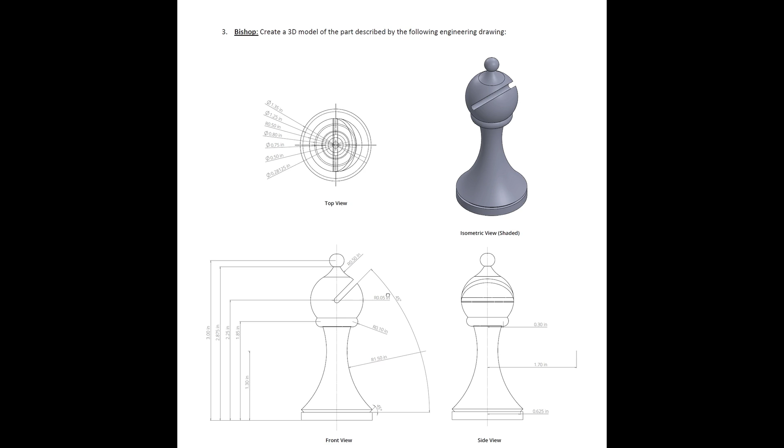This actually looks pretty intimidating when you open it for the first time. You see lots of arcs, lots of dimensions, but when you get down to it, it's not that bad. Geometrically speaking, the main part of the bishop is actually just like 5 arcs and a couple of lines.

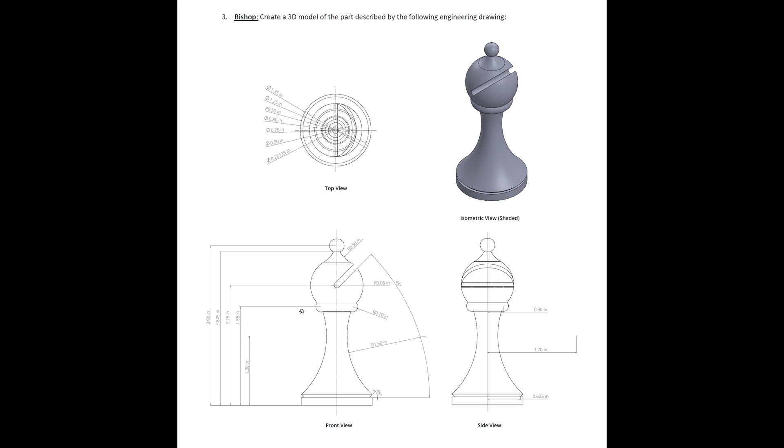So we're actually going to be modeling this using 2 features. The first feature is going to be a revolution, defined by a sketch consisting of half of a cross-section from the front view. Then we will create a cut, a linear cut, from a sketch on the front plane in order to match the part that's shown here.

So if I jump over to Solidworks and create a new part, I'm going to start with a sketch on the front plane. Now I'm going to arbitrarily decide that the origin of my part will be the bottom center, and then I will move all of my lines relative to that origin point.

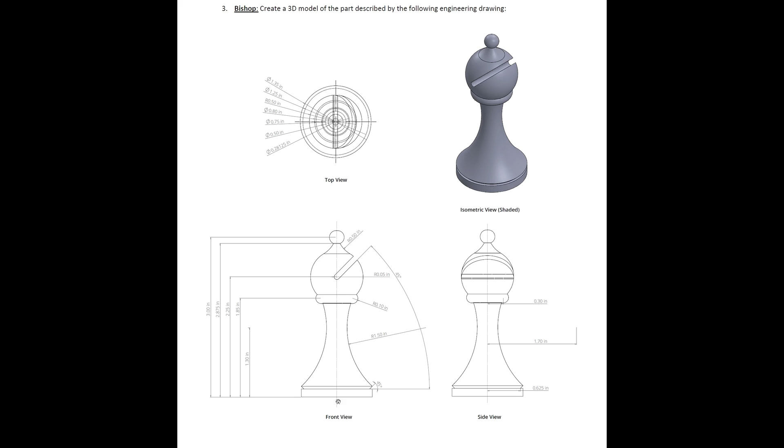So I will start with the basic lines representing the rough shape of the bishop. I will add a horizontal line from the origin, then a vertical line, then a jut in, and then an angle line up. And I'm pretty much out of simple straight lines.

Now I start venturing into arc territory. And I personally think that in this particular case, it's actually easier to draw whole circles instead of arcs, and then to trim off the parts that you don't need. Trying to draw this as a series of arcs just makes it a little more complicated, and it's harder to recognize the patterns and where the tangents appear.

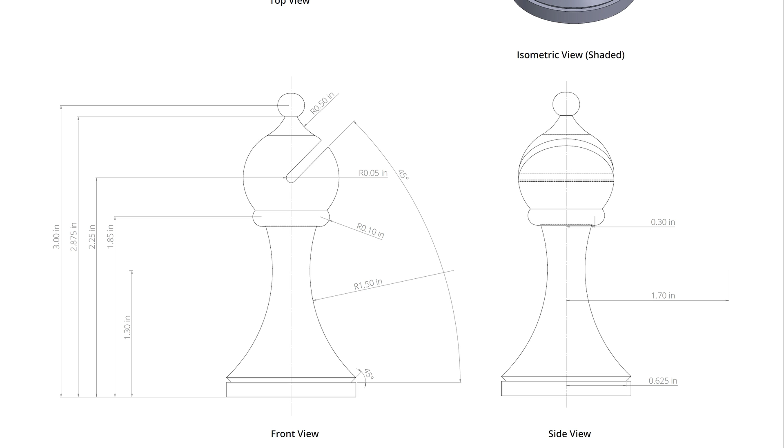But before I launch into circle territory, I'm going to add my axis of revolution just to make it a little easier to visualize what it's going to look like. So I will add a construction line of infinite vertical height, starting from the origin. There we go.

Now I have my axis of revolution. I'll add some circles. There will be one circle representing this surface, one circle representing the... I don't know if this is the head of the bishop, this is the hat of the bishop, this is the scarf of the bishop, this is the neck of the bishop. Okay, are we all in agreement on that?

So one of these circles will represent the neck of the bishop, one of the circles will represent the scarf, one of them will represent the head, one of them will represent the hat, one of them will represent the ball on the end of the hat, I guess. So I need 5 total circles.

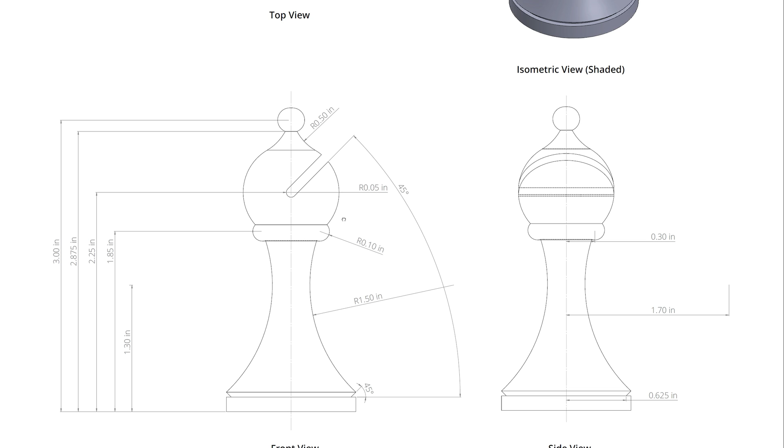So I'll use the circle tool starting from the center, and I will make 1, and then 2, and then 3-ish, and then 4, and then 5.

So I've recognized that these 2 circles are probably going to be coincident with this center point of that circle. So I've drawn it that way, but the dimensions will show us whether we're right or wrong. We can get rid of that coincident if we have to, but let's begin with those.

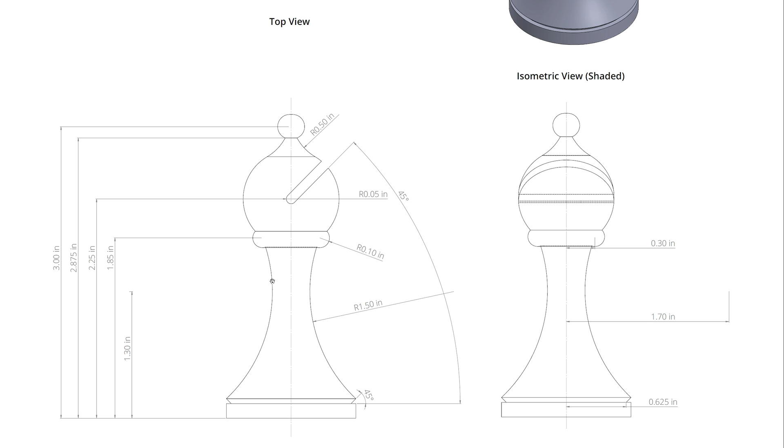Now I will start to dimension, and I'm going to start like I drew. I'm going to start dimensioning from the bottom center, so I need to know this distance here first.

And the way that I do that is by looking at this very scary looking top view. There are a lot of diameters given here. The relevant one here is the outermost object line, which has a diameter of 1.30 inches - a number that I won't remember for long enough to actually make it into Solidworks.

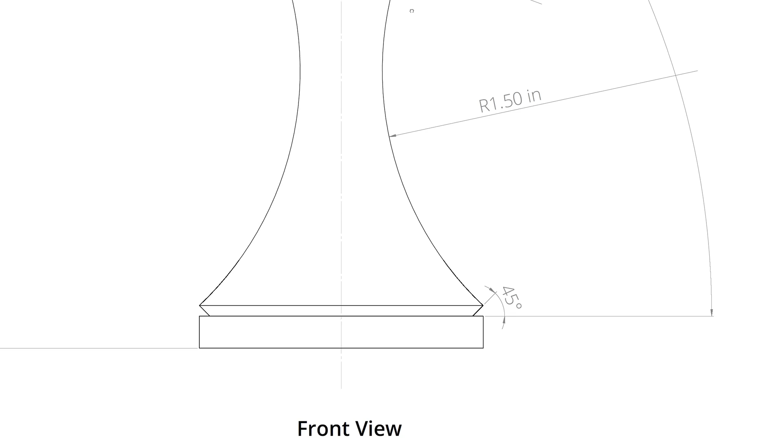If you look at the bottom of the front view here, you see how this point is vertically aligned with these 2 points. So that diameter of the outermost object line could represent this distance here, or this distance here. So that was 1.30.

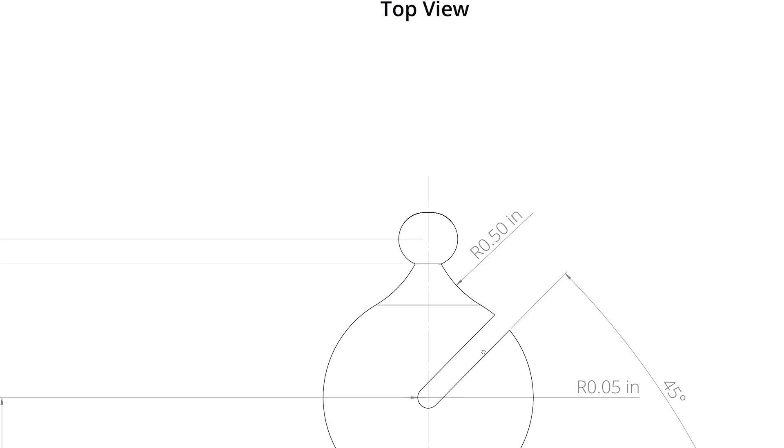Oh yeah, 1.35. So I'm establishing a radius instead of a diameter, so I will use half of 1.35, which I will allow Solidworks to do that math for me. And then I can't add a vertical distance of this yet.

I'm going to leave that for a little bit later. I know that you're probably concerned because you can't see that on the front view, but that'll fix itself later on. We'll come back to that, I swear.

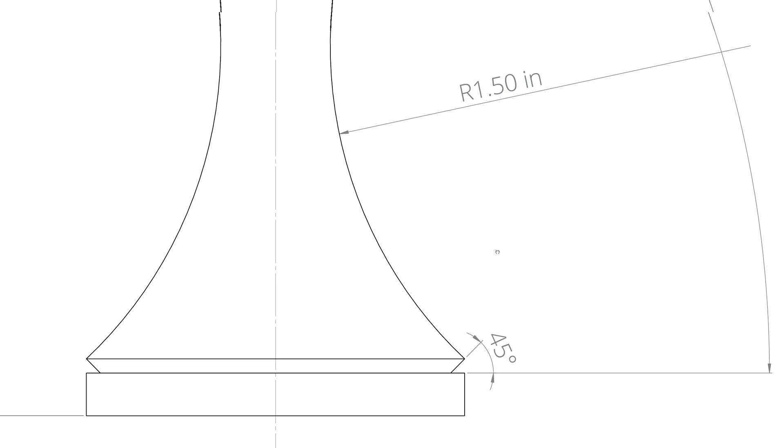Then I'm going to add the angle here of 45 degrees. And I will furthermore make sure that SolidWorks knows these two lines should be vertical from one another.

Cool. And I double click to exit my sketch for no reason in particular. I'm going to jump back into it.

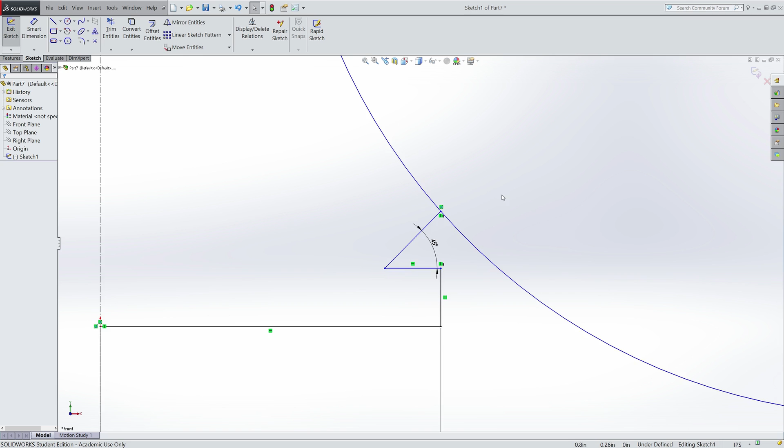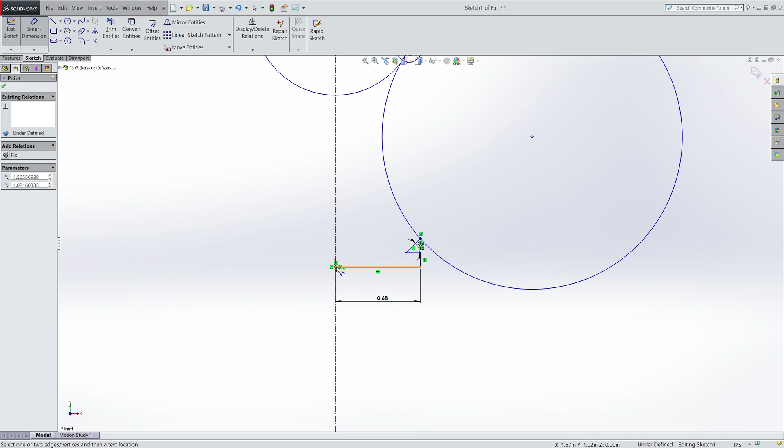Now I will add dimensions for this circle. The center of that circle is vertically 1.3 inches away from the origin, so I'll use the Smart Dimension tool. If you noticed when I was dimensioning that angle, Smart Dimension is pretty smart—if I click on two lines, it'll try to figure out what dimension I'm referring to. If I click on the center of this circle and then the center of the origin, depending on where I move my cursor, I can dimension a couple of things. I could dimension off this line, but I'm using the origin for demonstration. Dragging my cursor to the right gives a vertical distance, which should be 1.3 inches. Then clicking those two points again lets me add a horizontal distance, shown on the side view as 1.7 inches.

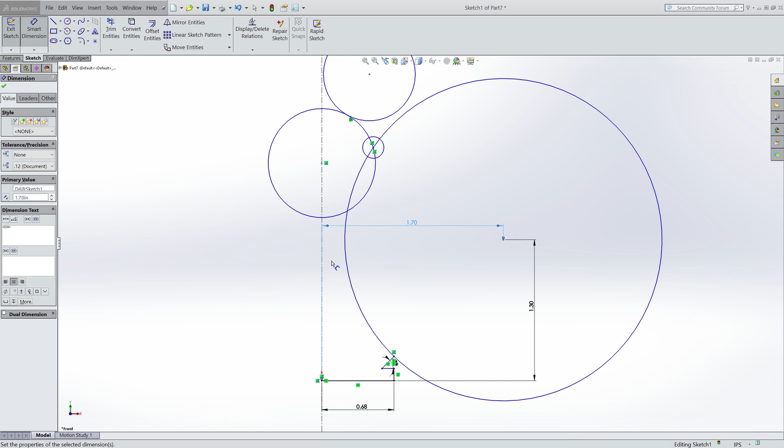Now I'll add a radius. It's shown as 1.5. SolidWorks will make me dimension a diameter, so that's 1.5 times 2, which on most days is 3. Wow, how did that end up being... let's try that again. 1.5 times 2 is 3, not 4.5. There we go, that neck is looking right.

So next up is the scarf, I believe. Let me drag my circle down to where I expect it to be, just to make that a little easier. That scarf has a radius of 0.1 inches, so a diameter of 0.2 inches. Wow, that's pretty close—good eyeballing me.

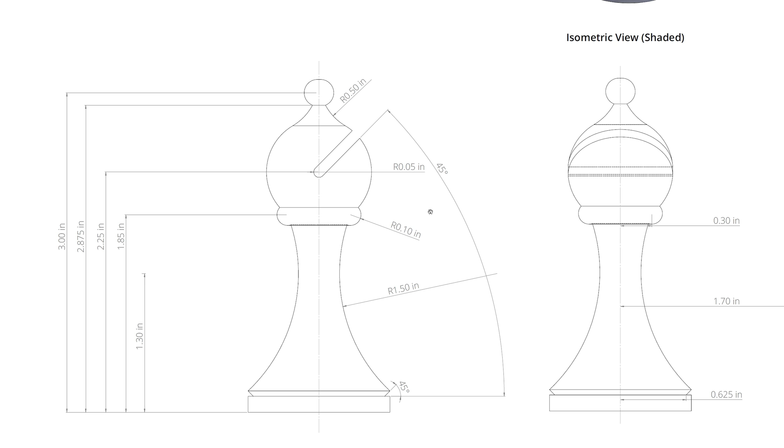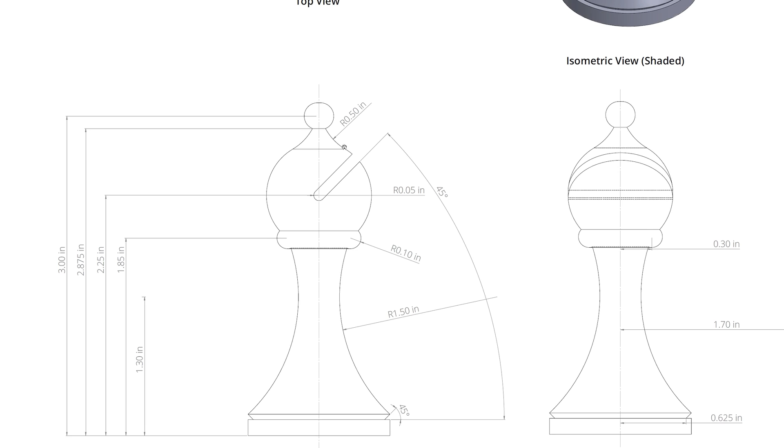The head of the bishop has a radius of 0.05—that would be this circle down here in the cut. So I need to jump back up to the top view, and recognize the head of the bishop will appear as an object line. From the top perspective, this bishop will have object lines here, here, here at the cut, and then here. So it's the object line that appears second from the outside—that's the relevant diameter. Second object line from the outside has a radius of 0.5.

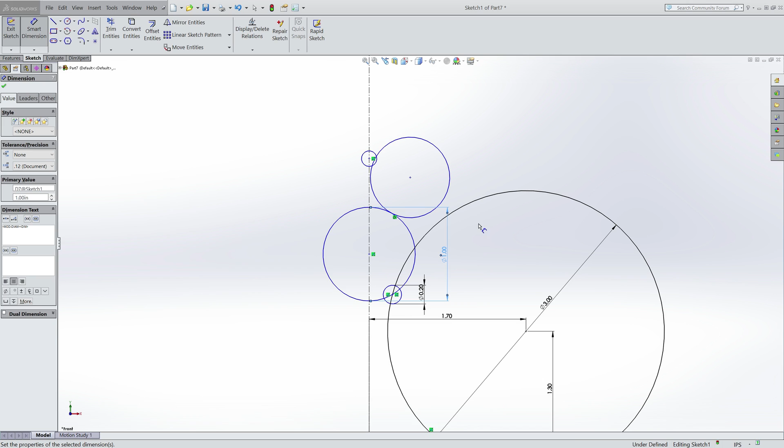Awesome, so a diameter of 1, 0.5 times 2. Yes, 1 inch. Then I'm going to give this a radius, shown on the front view—the base of the hat has a radius of 0.5. So that dimension is going to be a diameter of also 0.5 times 2, which I think is still 1, and it is indeed still 1.

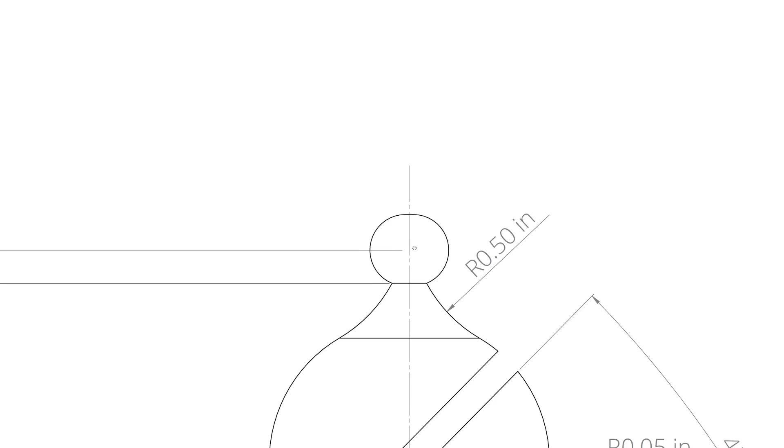Cool beans. Lastly, the ball on the tip of the hat, shown on the top view—again an object line, and this is going to be the smallest object line visible from the top. So the smallest object line is a diameter of 0.28125. Nice round number, 0.28125.

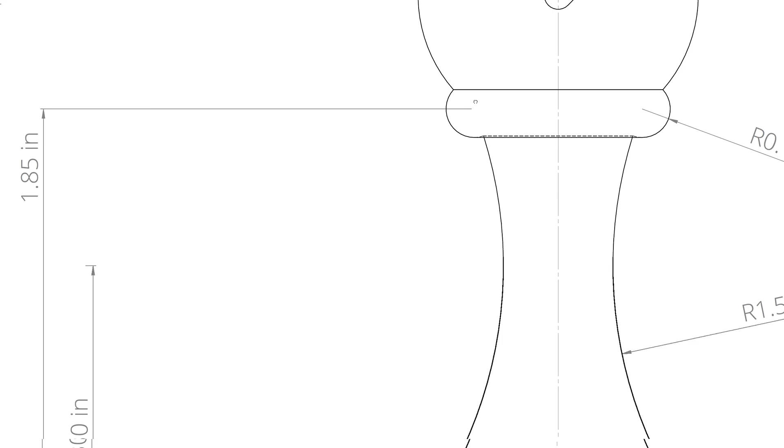There we go. Now I have my diameters, my circles, and this one is positioned, so I can start to position the rest of them. The first thing I'm going to do, just for my own sanity, is get rid of this coincident, because that's one that I'm predicting—I don't want to bind myself to it. I want to make sure it's free to move around, and if I think it's coincident, I can add that back later. But geometrically speaking, this bishop should end up pretty good.

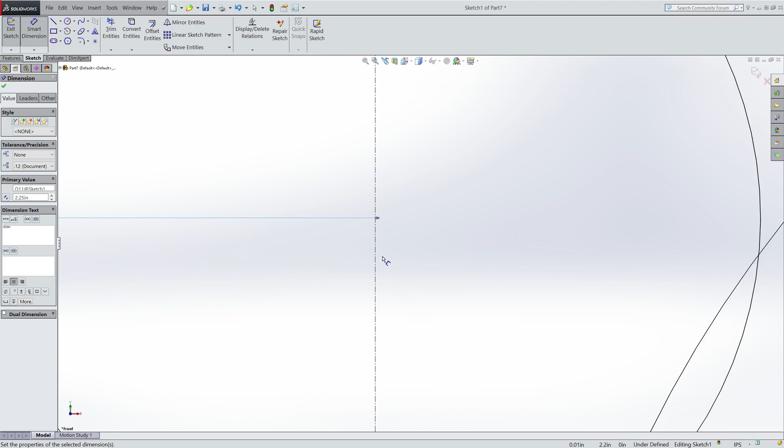So that is going to be a height of 1.85, and that's this distance here. 1.85. Then the next circle is vertically 2.25 up. 2.25, and look at that—look at that on the circle, pretty much centered, pretty close. Not bad, good job geometry.

And then my hat is tangent—the hat is also going to be tangent to the axis of revolution, so I'll add that now. I'm shift clicking the circle and the axis of revolution, adding the tangent constraint. Now that one's fully defined.

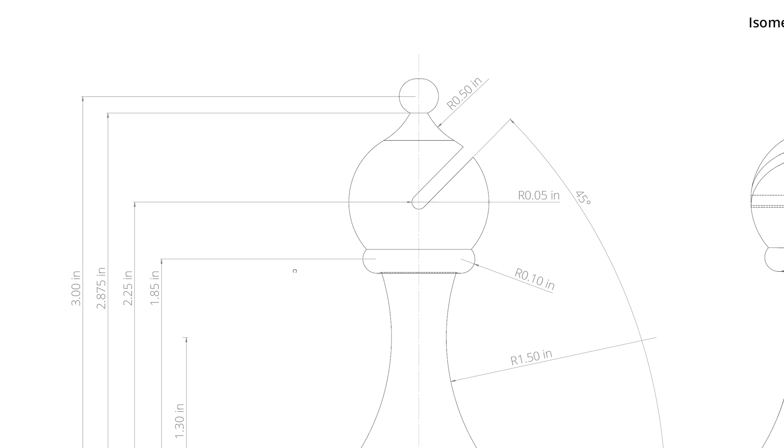Last but not least is the ball on the end of the hat, which is vertically 3 inches up. Okay, now I noticed I may have been wrong about that tangent. I was given a dimension here that's 2.875—that's referring to the intersection between the ball at the top of the hat and the base of the hat. So that supersedes the assumption of tangent between the circle and the center line. I'll get rid of that tangent and do this properly.

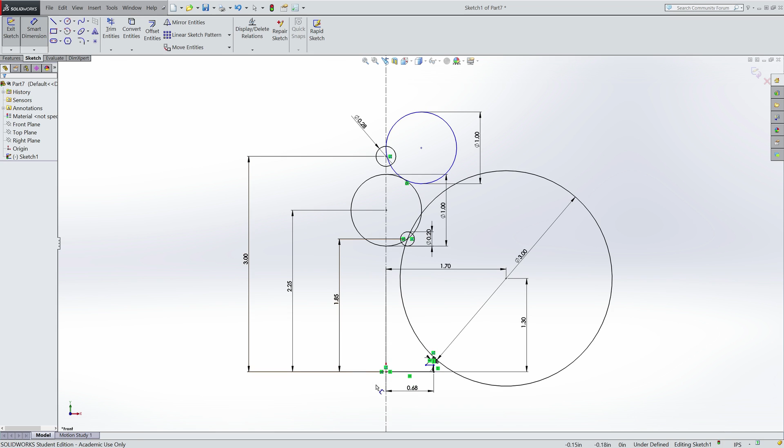Smart dimension, origin, this intersection here—so I'll have to do that a little differently. I need to clarify that I'm defining a new point, telling SolidWorks there is a point at the intersection of those two circles. So I create a point, and for the sake of demonstration, I'll draw that point out here in space. I now have a point.

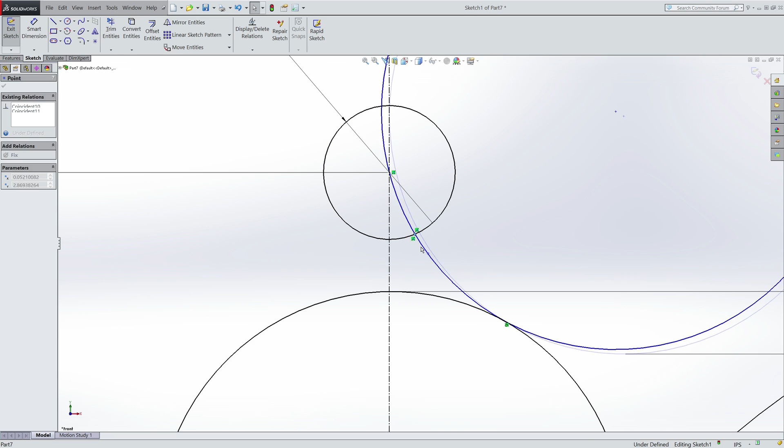Now if I shift-click that point and this circle, and tell it to be coincident, then shift-click that point and this circle, and tell it to be coincident, now that point is on both circles, therefore it's at the intersection. So I can move that around and adjust the position of the base of the hat thing. I'm going to use Smart Dimension, click on that new point, click on the origin, give that a dimension of

2.875, and look at that. Pretty close to tangent, but for the sake of round numbers, we're using that distance. So now I have some fully positioned circles.

Now I'm going to use my trim tool to get rid of the extraneous parts of the circles. Power trim is the easiest way to do that. You just click and drag, and any line that you go across is removed. SolidWorks tries to figure out the two intersections on either side of where you clicked through, and then removes the things between those two intersections.

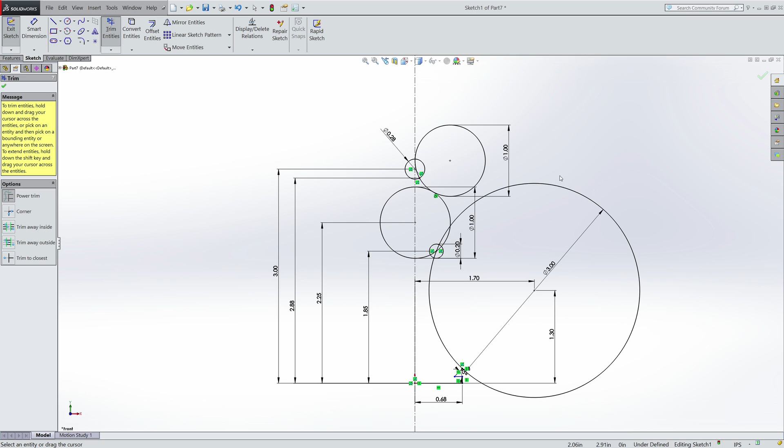So if I click and drag through this circle, you'll notice it got rid of that big part of the circle. The reason this little line is still shown is because that's used for dimensioning, showing the diameter of 3 inches. If I exit my trim tool and move this around, you'll notice that line disappears. It's not a real line.

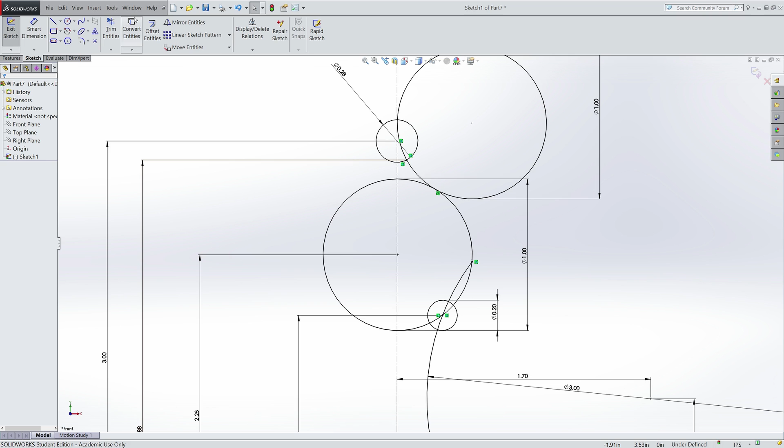So I will carefully use my trim tool and get rid of some more lines. That line, don't need that, oh whoops, a little too heavy-handed. Let's try that again. That line, and that line, and that line, and that line, and these two lines, and then that line, and that line, and that line, and that line.

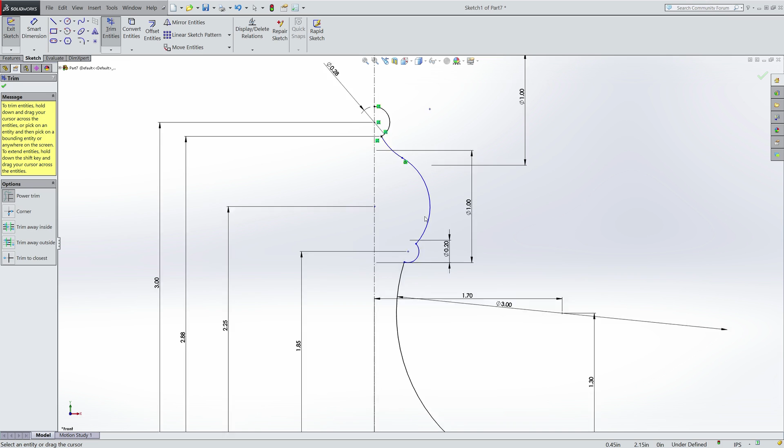There, I got rid of all my extraneous lines. You'll notice that I also kind of broke a couple of my constraints. That's okay, I can go back and fix those. So one of the constraints is the fact that I think this line doesn't know—yeah, so I need to clarify that position again.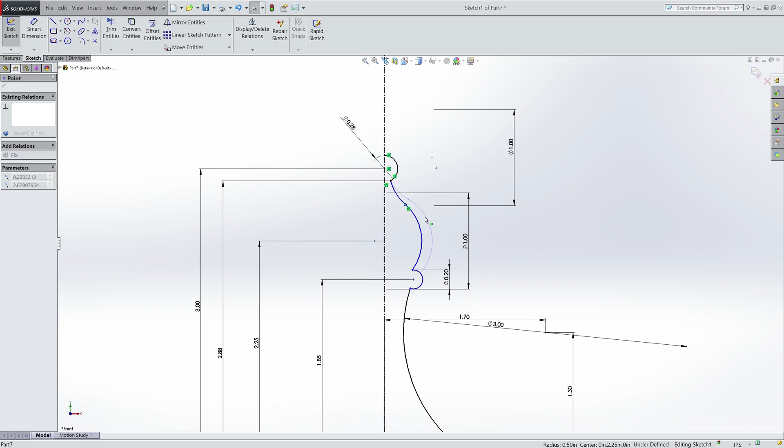So now that it's able to be moved around, I'm going to clarify that this head is going to be coincident to this point. And then I'm going to make this point, that's the center of this arc, also coincident to this arc. So I've basically restored the fact that these two circles had once been touching.

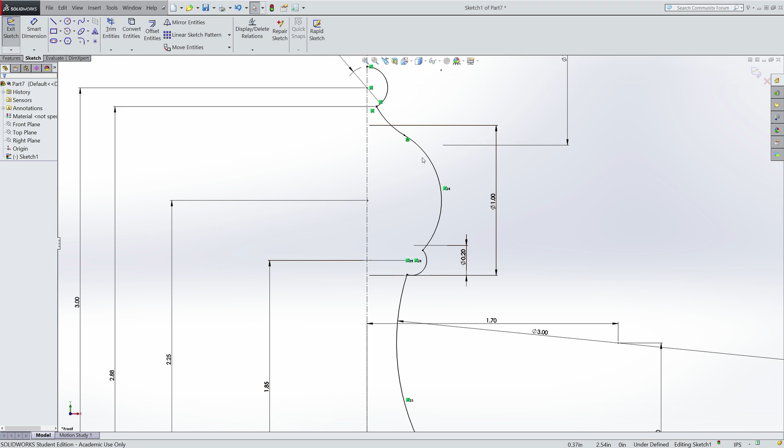So by making this center point coincident, I'm telling it that this center point and this line should touch. And even though they don't touch, they would if this line were continued—it intersects with the function of that arc. Now I believe all of my lines are fully constrained.

I have the basic part, except for this thing we talked about. I need to bring this back. So I'm actually going to be giving this a horizontal distance, not a vertical distance. You see I can drag this around, and if I give it a horizontal distance, that'll bind its vertical distance as well.

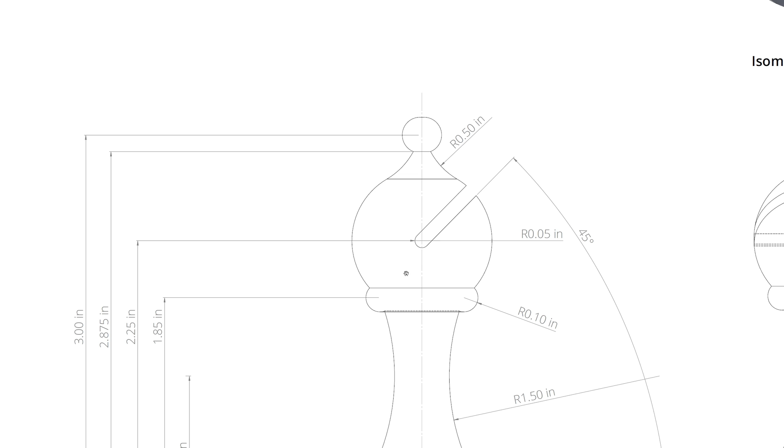That's actually shown, I believe, in 2 places. On the top view, you can see that's the second line, 1.25. It's also shown down here for a little bit of over-dimensioning, so 0.625 radius or a 1.25 inch diameter. So I'll use this distance, 0.625.

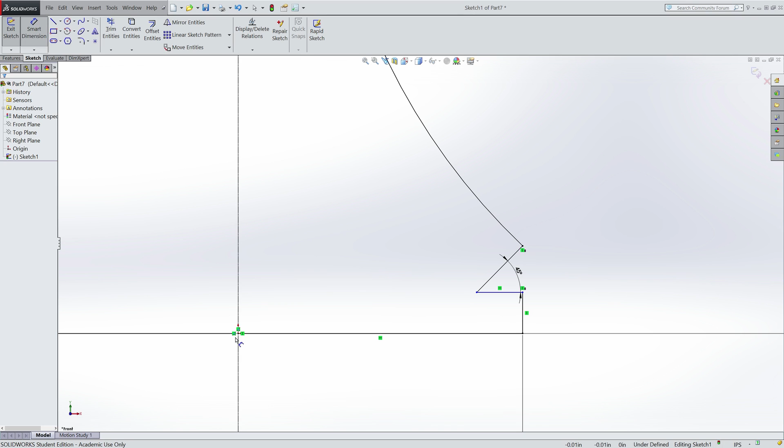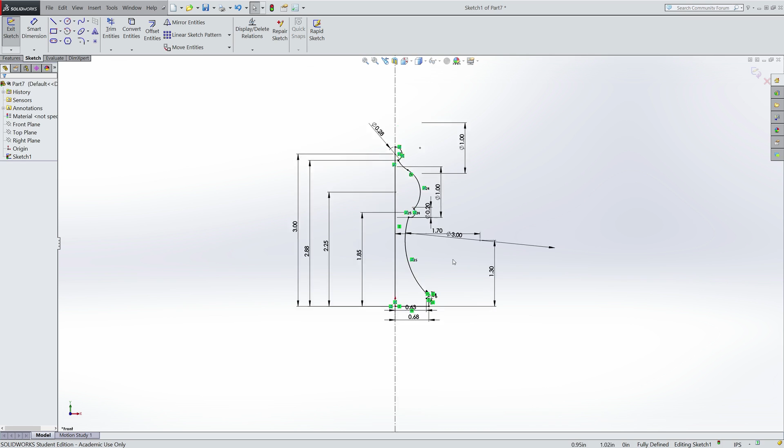I'll smart dimension from the origin again, and then this point, and drag it down to give it a horizontal dimension. And that was—let's try it again—0.625 inches. Now I believe I have a fully constrained sketch. So for good practice, I will add a line down the center to close the region. Now, with much ado, I can create my revolved base.

And look at that, I've got a good looking bishop. So if you just tried that at home and you were unable to get it to work in a single click like I just did, you may have had to go in and close your sketch somewhere.

You may have had too many lines. SolidWorks needs to know what the region is that you want to actually extrude, the thing you want to make into a solid. If you had too many lines, you may have had to go in, click this box, and then click that region. That's a thing you may have had to do.

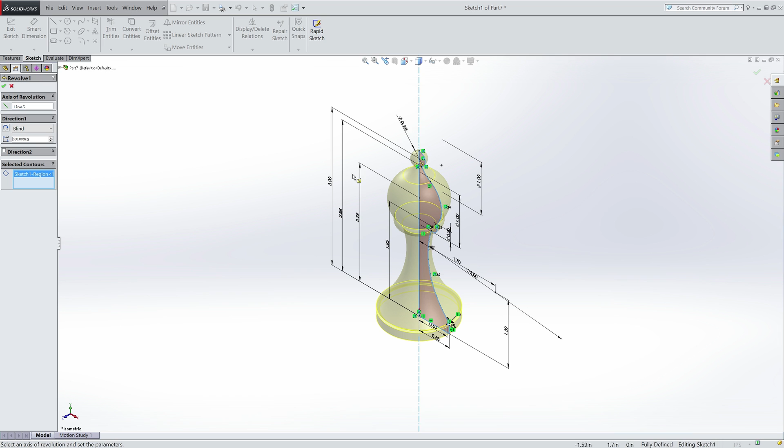But because I got rid of all the extraneous lines, SolidWorks knows the region that I want to extrude. So that was an advantage of doing it the way that I did. But regardless, we have the shape of our bishop. Isn't that a good looking bishop? I agree, it is indeed.

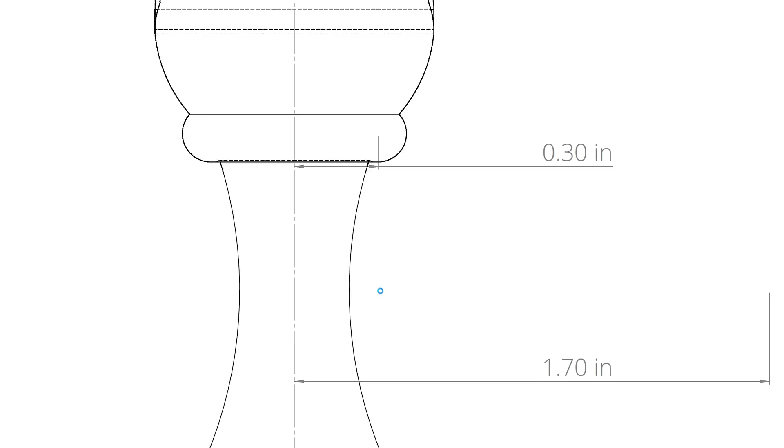Now I'll add my cut. So I need that cut, this slot, to be visible directly from the front view, which means I'm going to be drawing it on the front plane and then extruding the cut.

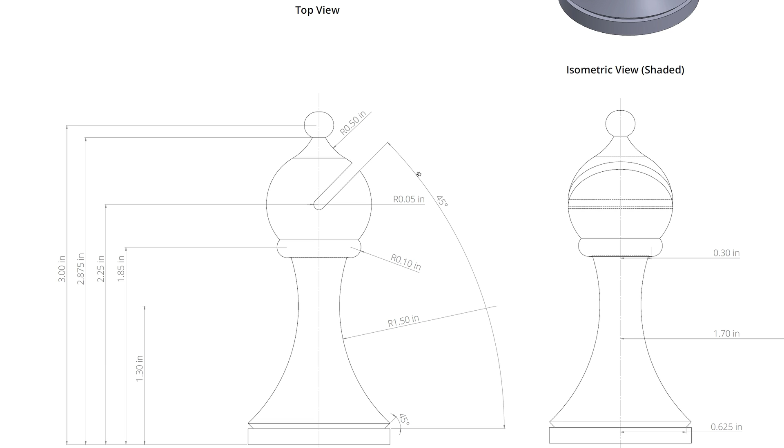So I will create that basic shape on a sketch on the front view again. I will go up to Sketch, create a new sketch, select the front plane, and now I recognize that I begin with a circle again, and that circle shares the same center point as the head of the bishop. So if I hover over this arc, you'll see that nothing appears.

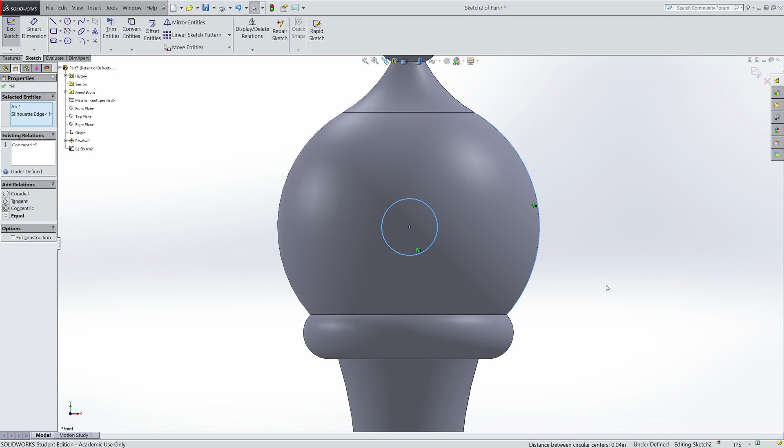So I'll just add a circle in the center arbitrarily, then highlight the circle and the arc out here, and tell SolidWorks I want those to be concentric circles.

You'll notice that if I vertically align it here, that breaks. In my original sketch, because I told SolidWorks to have this arc intersect with this point, the center of that arc isn't exactly over the vertical point. So the center of that arc, according to the dimensions in the drawing, is not above the origin. It's not vertically aligned, so this isn't actually a sphere, it's a slightly wider sphere.

So going with concentric circles here is not actually the best way to do that. Let's jump back to the other sketch. By defining it to be concentric with this arc, I am now not concentric with this arc. So I have the option of being concentric with this arc or this arc, but not both, and neither one is going to be vertically aligned.

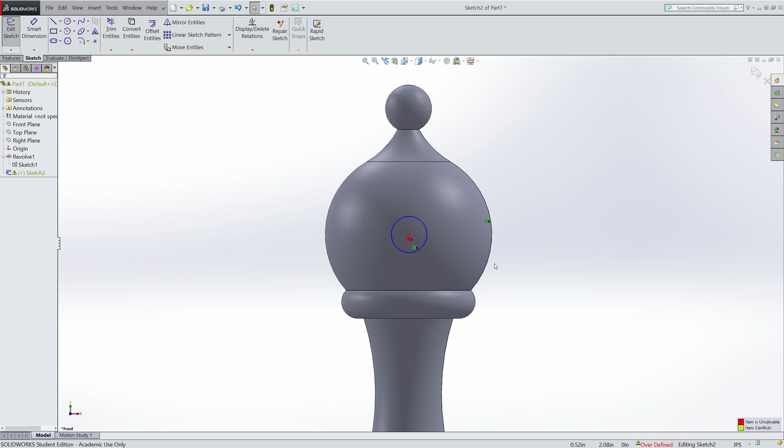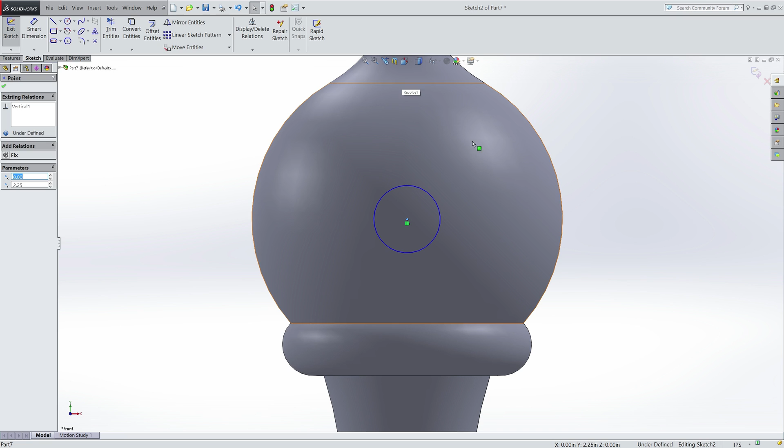So let's approach this from another angle. Maybe instead of being concentric to one of those, it would be better to be centered on the head of the bishop. If I want this to be vertically aligned, you'll notice it didn't break anymore. Maybe I want it positioned such that the center of the circle here is vertically aligned between these two lines.

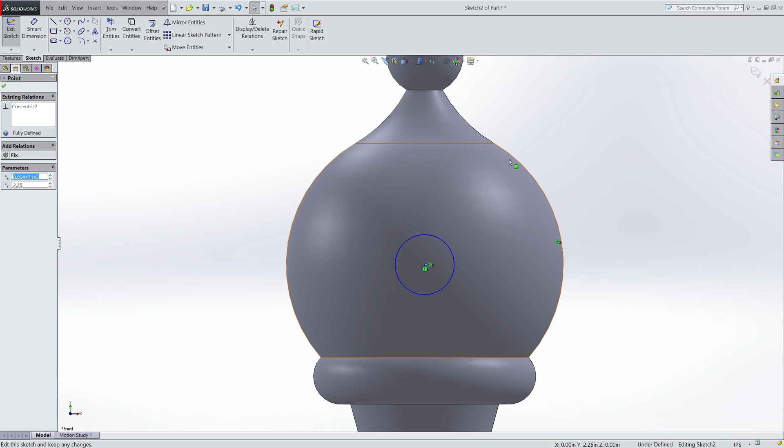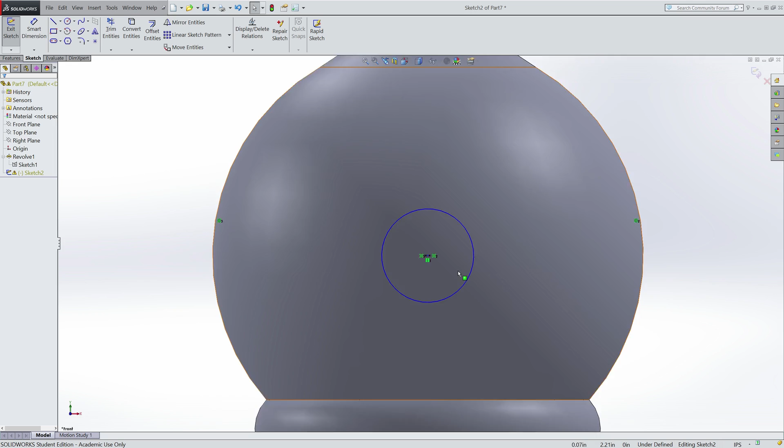Or, better yet, I'm actually going to use a point again. I'm going to tell SolidWorks that this arc and this point should be concentric. By highlighting that point and shift-clicking this arc, I've told SolidWorks to create a point at the center of that circle. Now if I repeat that process, adding an arbitrary point, highlighting this arc, shift-clicking this point, making them concentric, I now have 2 points representing the centers of both arcs.

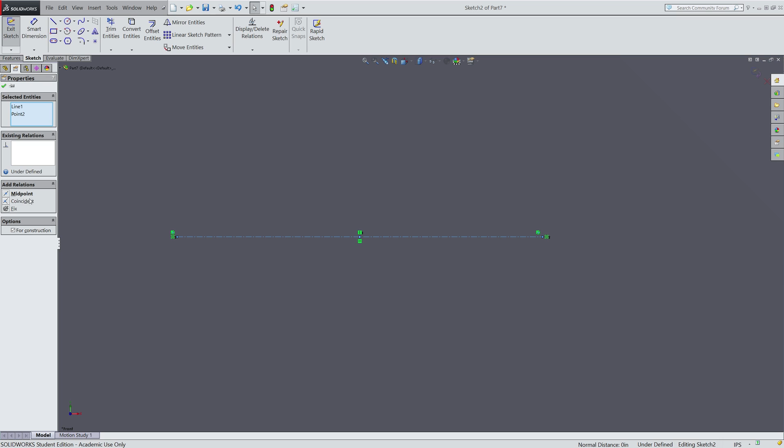So now, if I add a construction line between the two, I can add this point, which is the center of the circle I'm creating, and shift-click this line to make that be midpoint. That's the best way to center that circle. How's that for convoluted? It would have been much easier to have interpreted the engineering drawing as having this be centered over the line, without this line being coincident to that point.

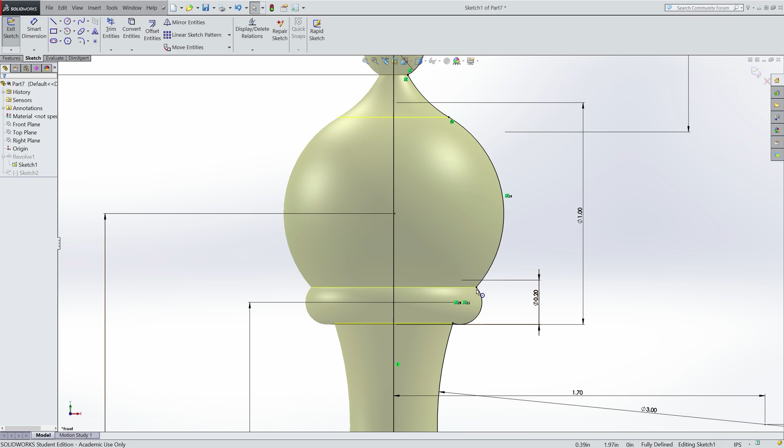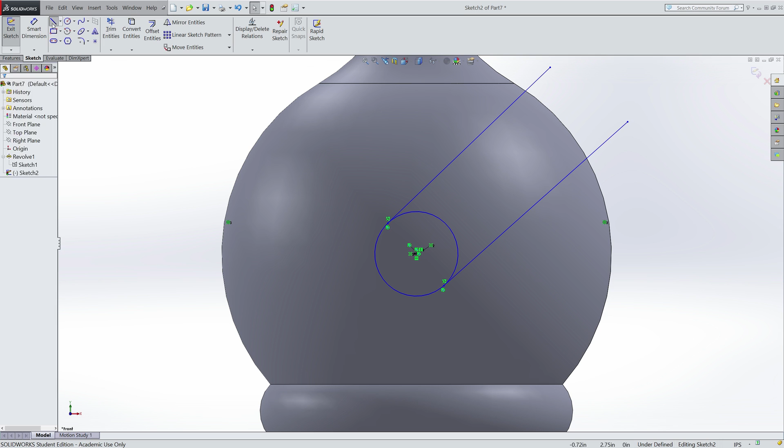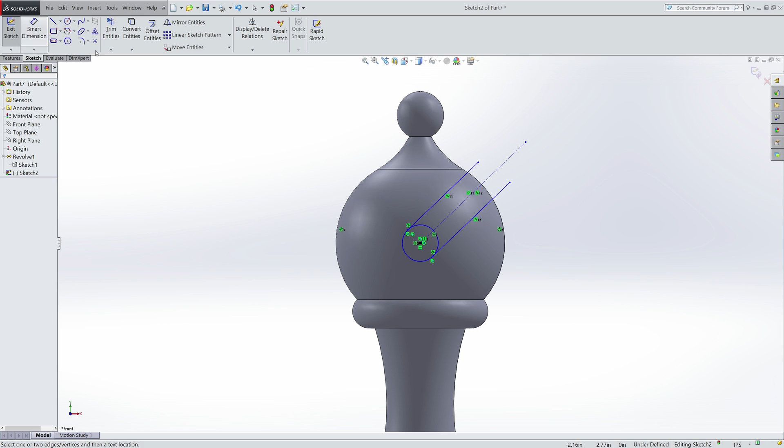Let's jump back to the other sketch. Here I have a circle, now a completely logical circle. I'm going to add some lines, because circle plus some lines is the shape of the slot I want to cut. I'll add a construction line from this point. Too many points, too close. Then I'll tell SolidWorks to make these 3 lines parallel. Then I'm going to dimension this line as having an angle of 45 degrees.

Why that surface, you ask? Because that was what was shown in the drawing. Then I am going to have to close off this sketch in order to create the cut, so I'm going to add another arc here.

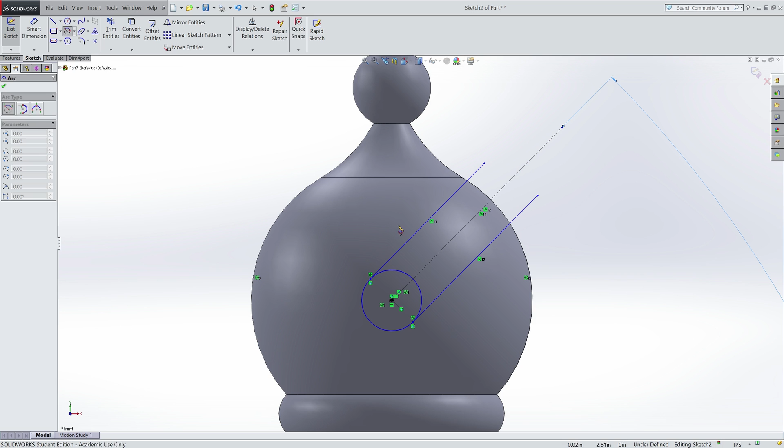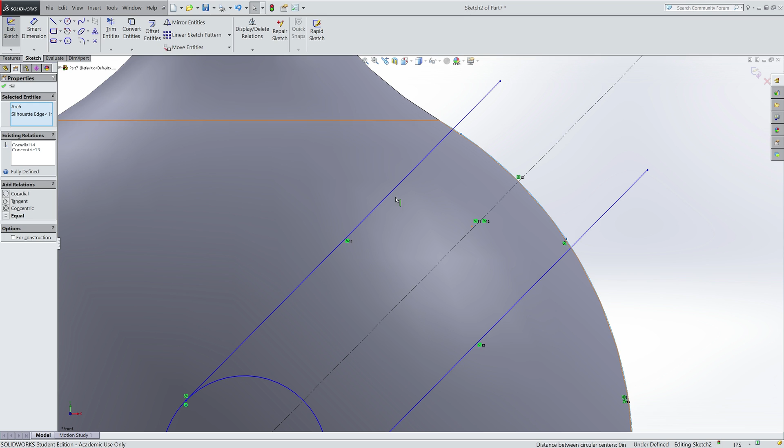In this case I'm actually going to use an arc instead of a circle. So I'm using a center point arc, using the center of this arc over here, which again is represented by this point, and connecting these 2 points. Just for demonstration, I'll make this arc out in space, highlight this arc and that arc, make them concentric, with which they already are, and coradial, make this point and this line coincident - that should result in these two being pretty much coincident, but I'll add the constraint just for good measure.

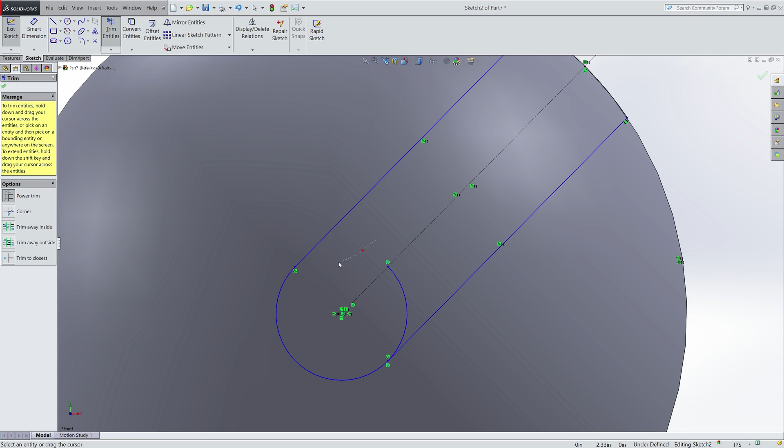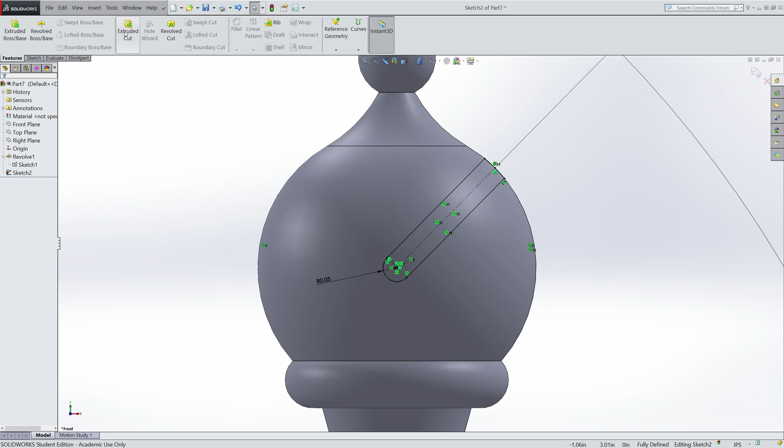So I'll exit my sketch, go to features, do an extruded cut, and I want it to cut all the way through in both directions. So I use the through all option, click OK, and now I have my shape. If I look at it from the front, that matches my drawing pretty well. So I'm going to create an isometric view and then export my part.